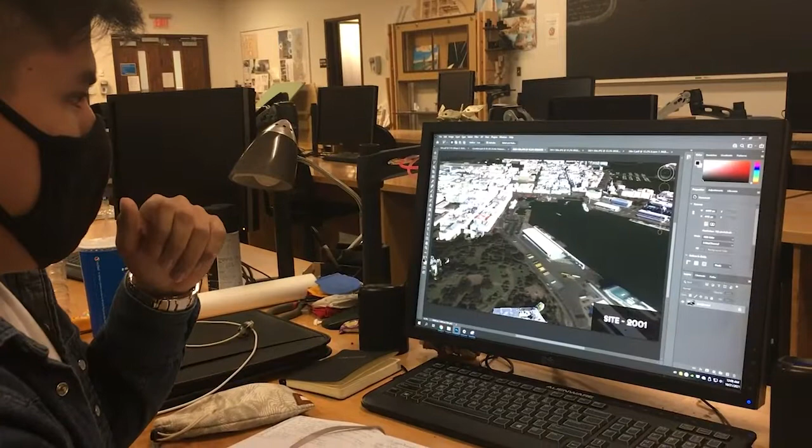This other one I'm still working on, but also emphasizing the green, blue, the life of the site. I had an idea to show what the site looked like from 20 years ago to 10 years ago to now. So this is 2001, this is 2011, and this is 2021. It hasn't really changed that much, but from 2001 to 2021 you can see a little bit of difference.

But this is my other site studies, my site analysis. This one has noise and views, visibility, access points from the site. It also has the circulation, you can kind of see it, it's yellow, and then the bus areas and all the trolleys and whatnot of the area, and you can see boats and all that. But yeah, that's it for now.

As we go on to the next phase, you'll see the progress, and again I'll do a little bit of a documentary of how the project goes along. I took notes, but you have all the stuff I gotta do and what's on my mind, putting it on paper for now, all the research. But yeah, that's it, stay tuned.

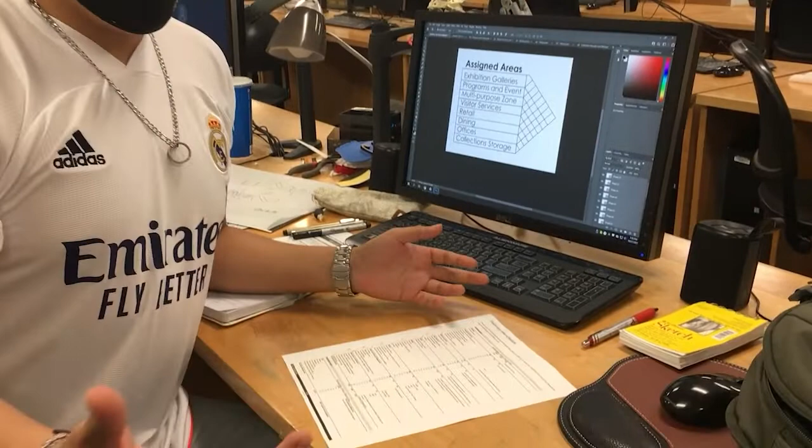I was doing the matrices for the areas. I don't know, I'm kind of overcomplicating it, I guess, because Declan's just doing one for everything. So he's doing all the assigned areas we have and just making that one, while I went into every assigned area. I probably didn't have to do that, but it is what it is.

So you can see all the assigned areas and all the different areas that I have. And this is going to be a legend, so all the colors: mandatory, recommended, neutral, and negative spaces.

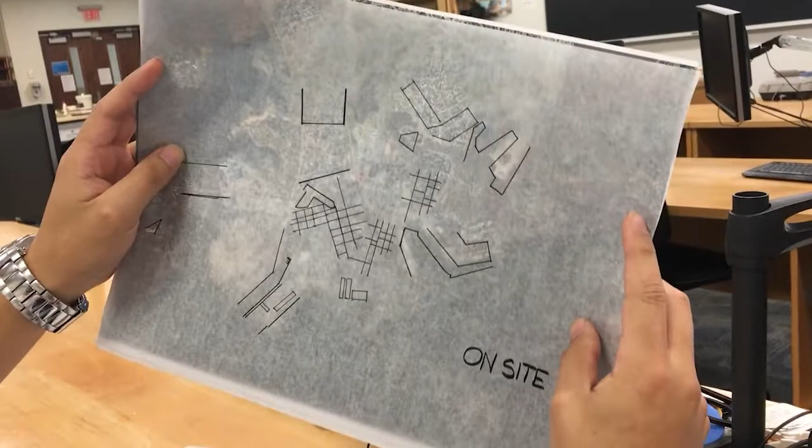And if you want to stroll over here, I did some site analysis, some concept site stuff. I was taking everything on the site, so you can kind of see it here. I think I'll show a better image on the video when I get the chance.

But you can see how I kind of go on with the roads. So this is all kind of roads, building-ish, and this is connecting with waters, connecting points off the site. And that's the micro view.

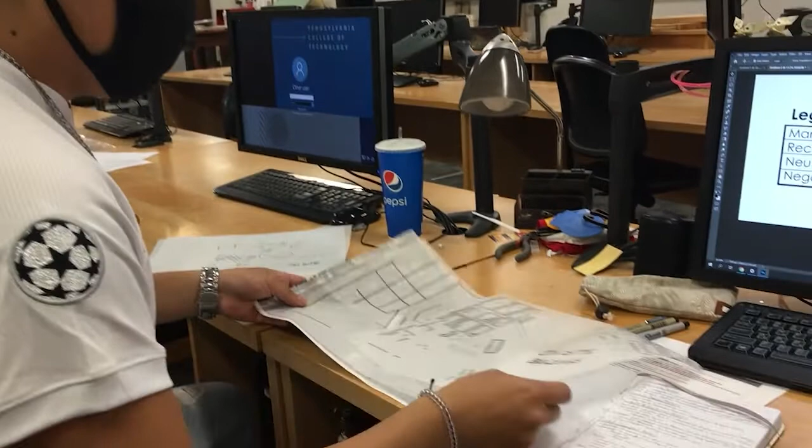And then we've got the macro view, which is off-site, so you can see water areas, but I also connect the three boats together to make a triangle and a little rectangle, and then other points to connect. Same as the other one, I connected these roads, and then these would be buildings on the site. But that's all I got so far.

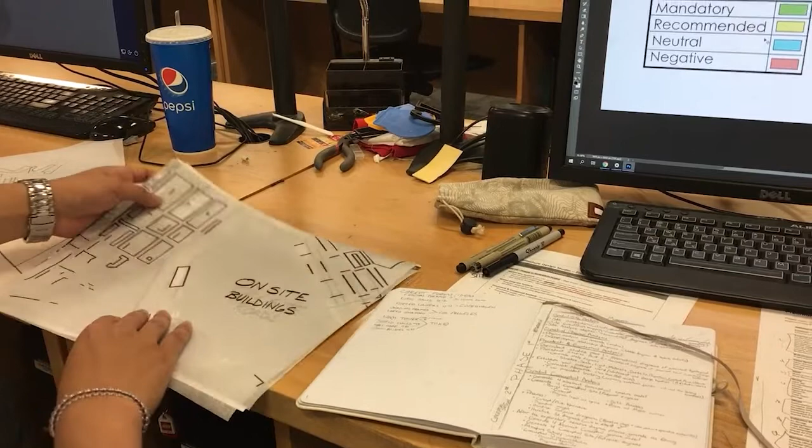It's a continuation. Gotta continue doing this, so I need to outline all the matrices, organize what I believe is mandatory, recommended, neutral, negative, and their assigned places. Then continue with the bubble diagram, the concept narrative, my narrative, and the words I'm going to use. Follow along.

Can you explain? I'm doing some studies of this building, showing the light and shadows. Just doing a bunch of different iterations. On this one I showed scale, so the scale of the building compared to people. This one is just the form. Investigating general study diagrams, this one's on light and shadow, so those are the shadows. I'm not sure what I'll do for the light, maybe I'll just keep it white or something.

It's interesting, I'm starting on mine right now. You can see I've got my images here, for the dining eatery area, facade studies, and interior area, since this is supposed to be a museum - the Hall of Fame of music. So that same building on the outside, different studies of different buildings. I've got a bunch of drawings here, so I need to figure out what I can take from each one to utilize to my extent.

And yeah, that's pretty much it. Just got those out, and then finished the bubble diagram, all of it, all the good stuff. Like four of these in general, just color them in, and then it should be good. Alright, so stay tuned. Alright, peace out.

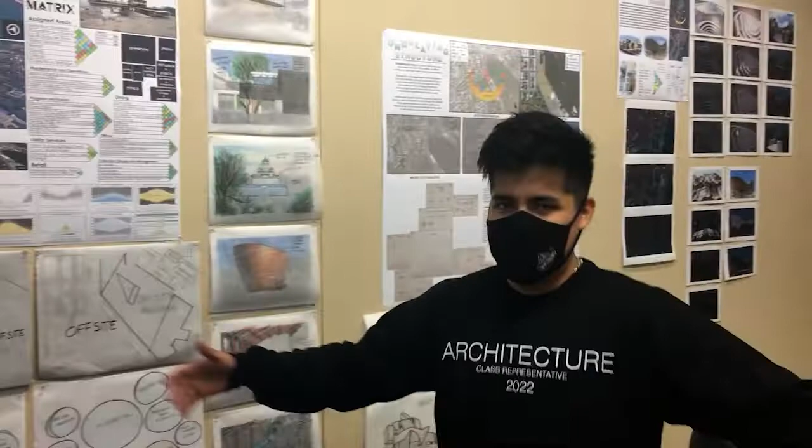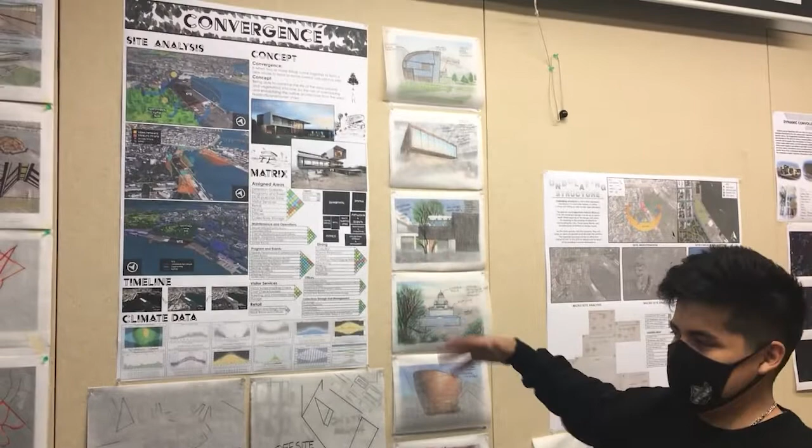Alright, we're back in the jury room. 2017's right there, if you wanted to know. Afterwards, we're back, Alejandro right here, Declan's on the camera, my friend Kavi's over here, never been introduced, over there. Show him real quick. Hey. And we're out here, it's post presentation, so we already presented. Kavi's setting up because his class is about to present.

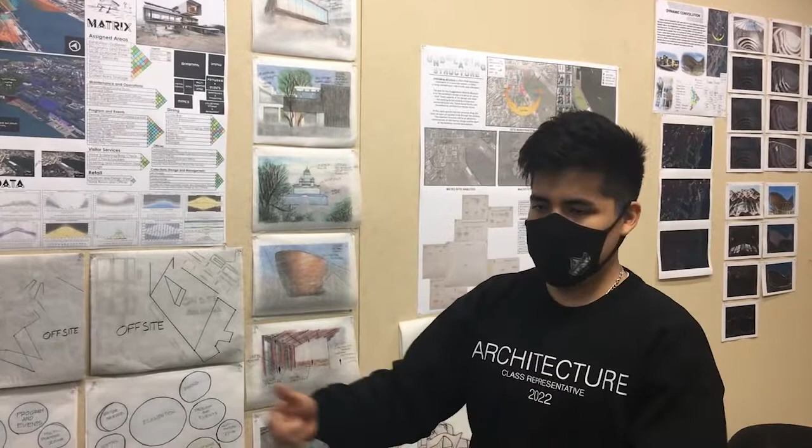My word for the first phase, the research phase, so we had to research the site, research all the different types of architecture and all the different types of styles we wanted to use. My word was convergence, convergence.

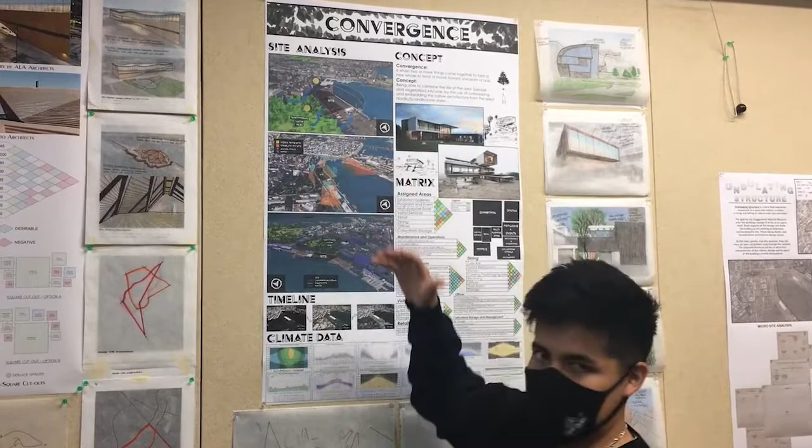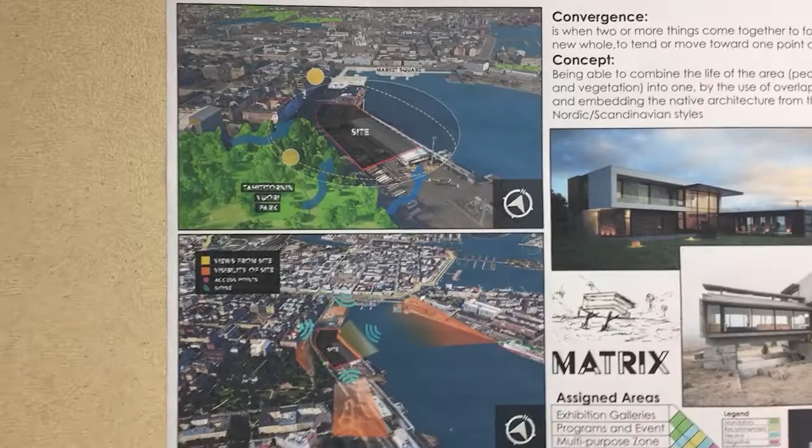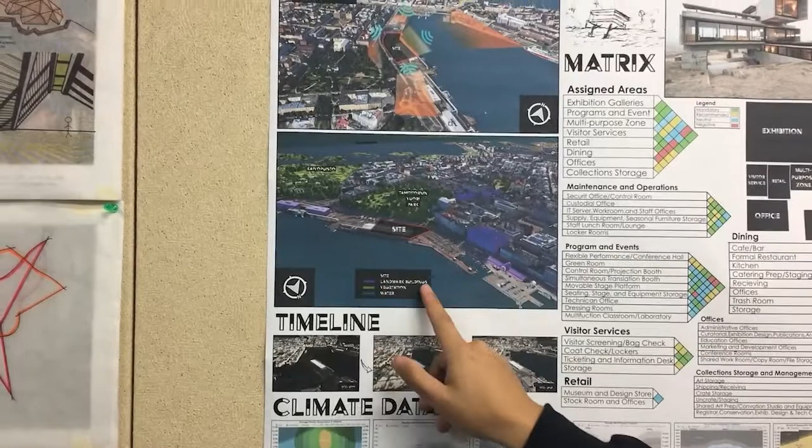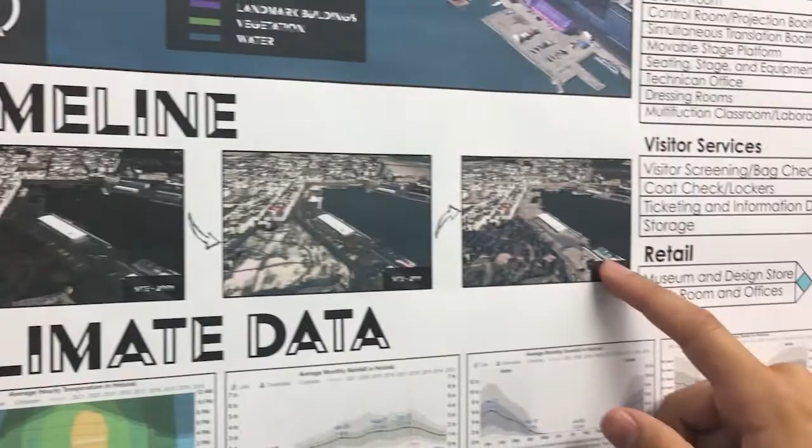Word convergence. For site analysis, I took the information of where the solar orientation is, wind, vegetation, where vegetation is on the site itself, and how it's surrounded by the body of water and how there's market squares there. The other site analysis is the noise, views of the site, views from the site, and then public landmark buildings in purple, and also vegetation and water. I did a little timeline of 2001, 2011, and 2021 - I remember I said 2012 last time, but it's 21. And then all the climate data: rainfall, snowfall, wind speed, climate, temperature, all that.

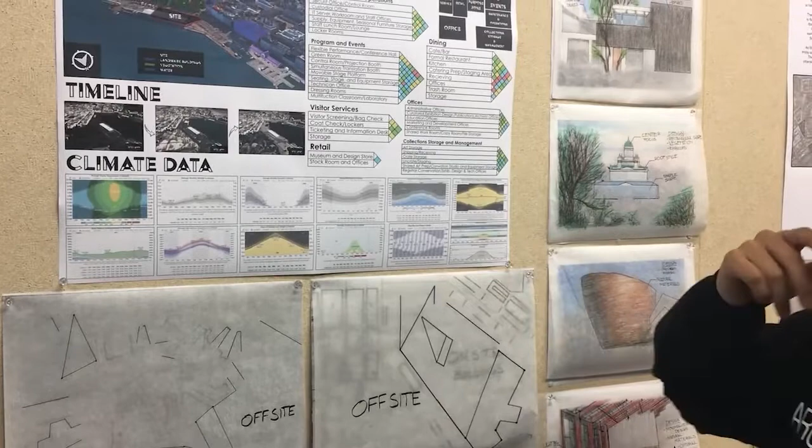It also includes the tourist data, the higher amount of tourists going to the area is in July. Fun fact for Finland.

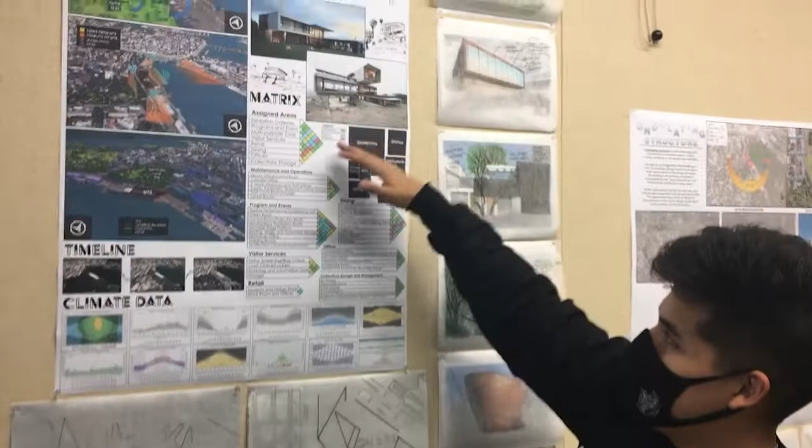And getting to the matrix, it's a single project, we're no longer in groups, sadly. Sadly, Declan, we're no longer in groups, but it is what it is.

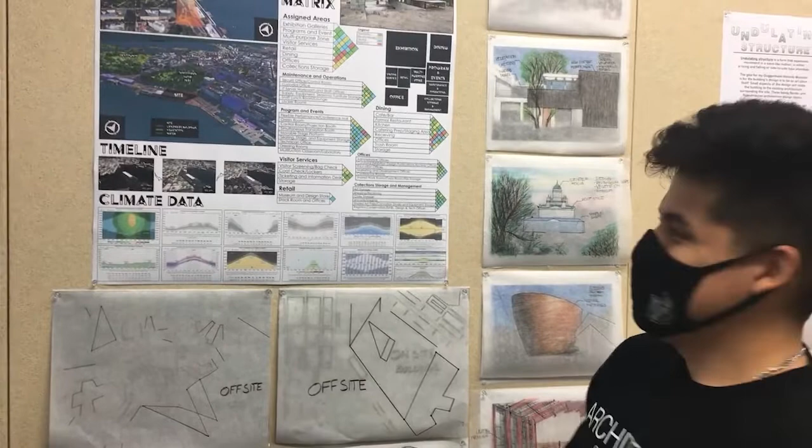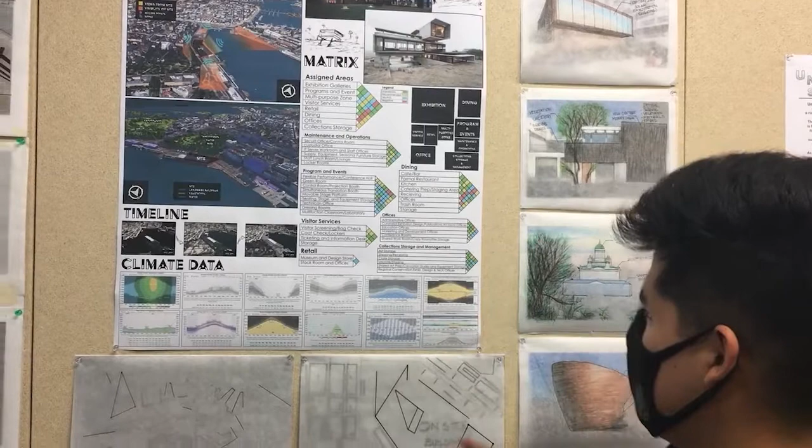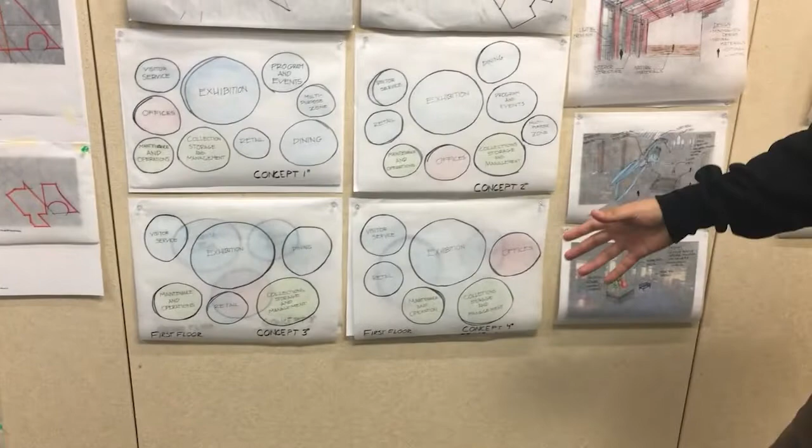Matrix - I took all the areas in groups and made that matrix to see the relationships between each other, then separated them into different little sections. It was a little bit too excessive, no one else really did that, but it helped me come up with a cutout diagram, which I photoshopped to look a little better, and then bubble diagrams of ideas for the possible floor plan. Still really just concept, not really focused on that much - more focused on the research.

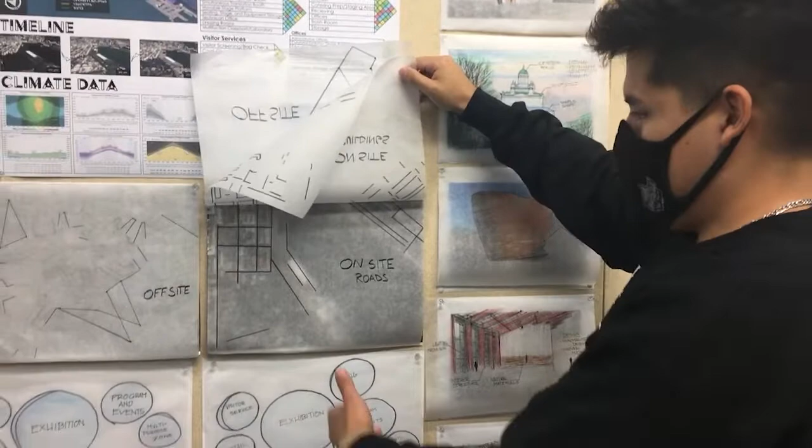So for the micro macro drawings, from the micro it's just the site itself, and then I got the roads on the site, which gave me an idea of more of a square cutout, rectangular. That's where I got the building's rectangular shape and more fine line finished. Same with the macro version of the site.

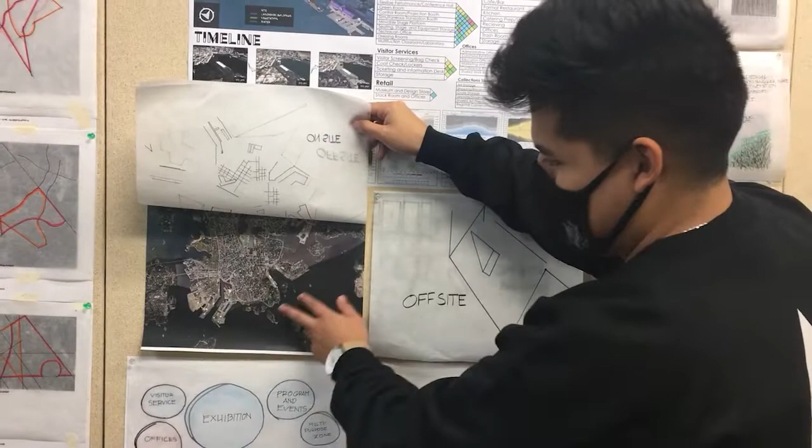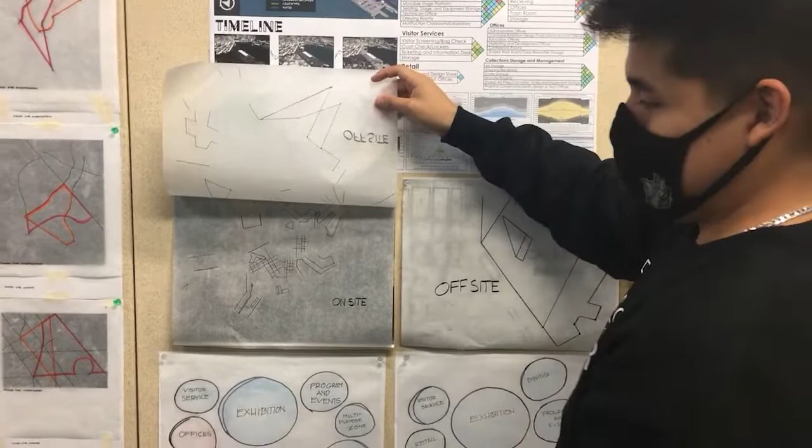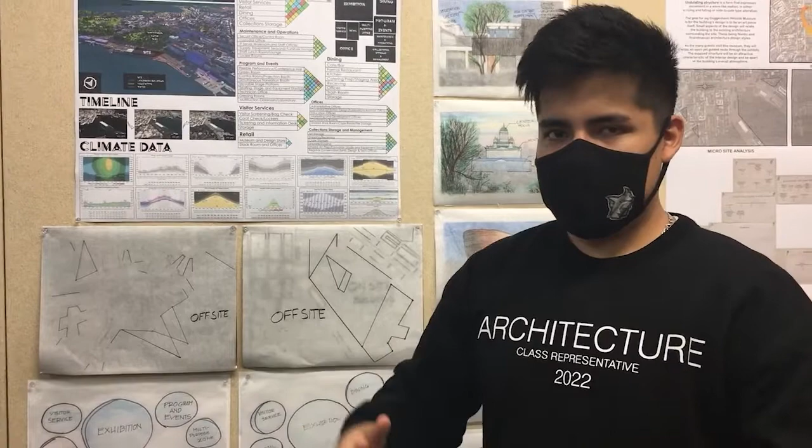So it's in Helsinki, Finland. It's going to be a Guggenheim museum. Using my word convergence, convergence means the bringing together of multiple different things or several things meeting at one certain point, or them forming one whole new thing. So that's what convergence means.

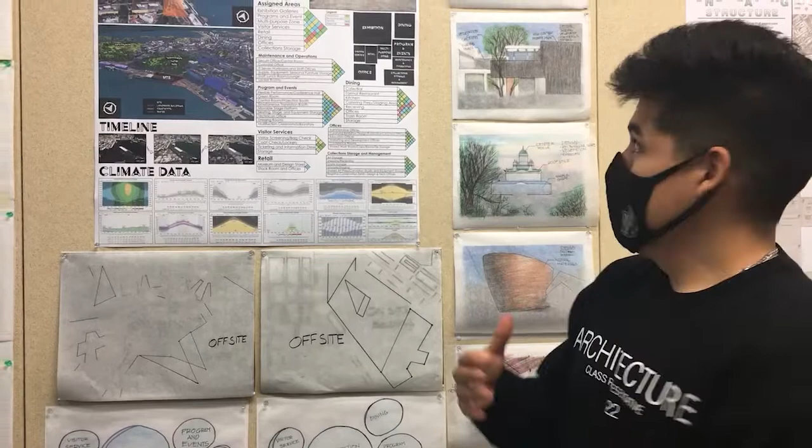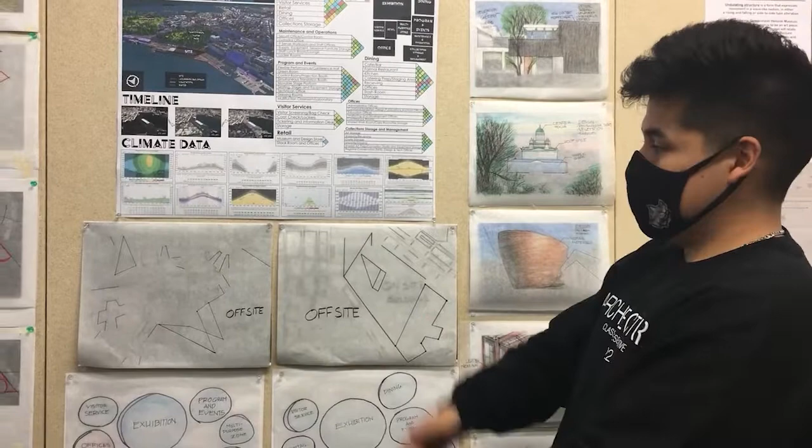My concept overall is to bring the vegetation and the public together, along with the artwork that we're going to show in the museum, totally combining that, having them set at a centralized point, being the museum. Moving to the precedent images and research that I did, I took several buildings from the area, from a chapel, a studio, to a music hall.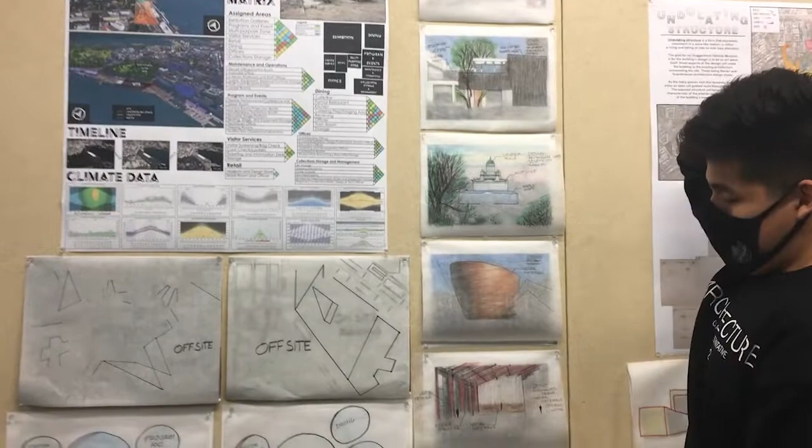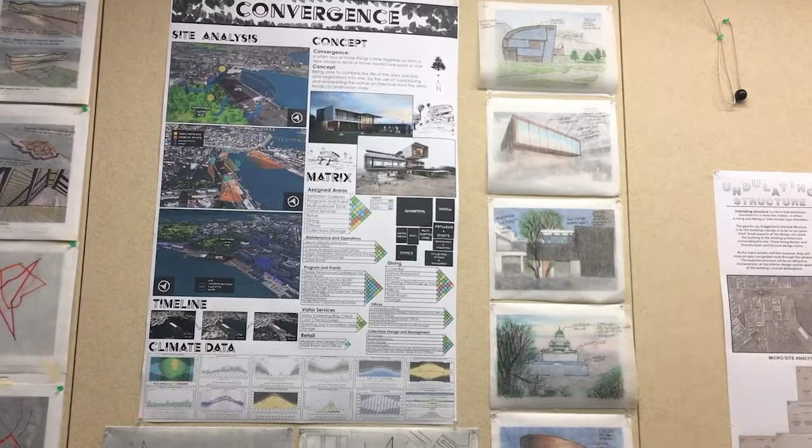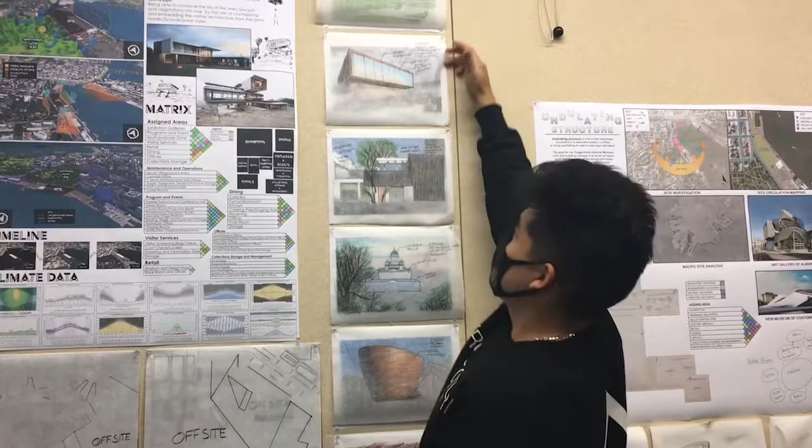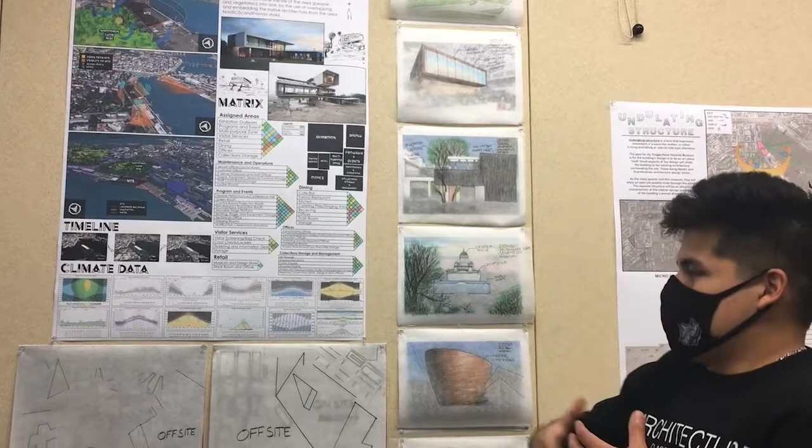The first one I got extended facades for shading, and organic colors and color variety, so playing around with the colors. Summarized, that would be simple modern minimalistic form, adding vegetation to the site. This one is more solar, because the windows have more focus on orientation, optimizing the solar gains, where you can get it and where you don't need it.

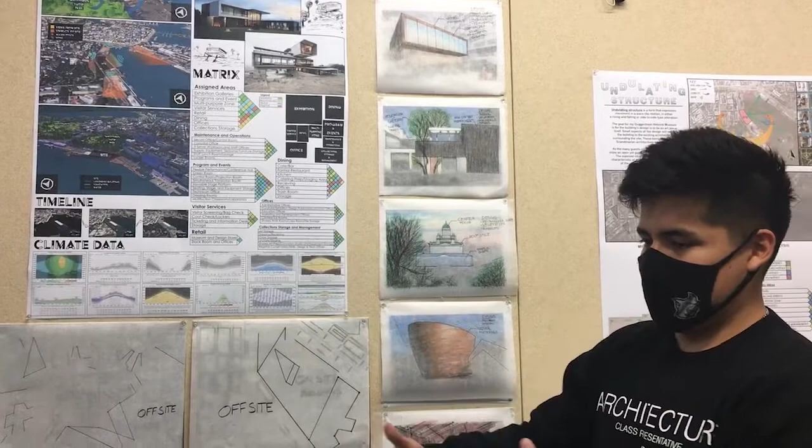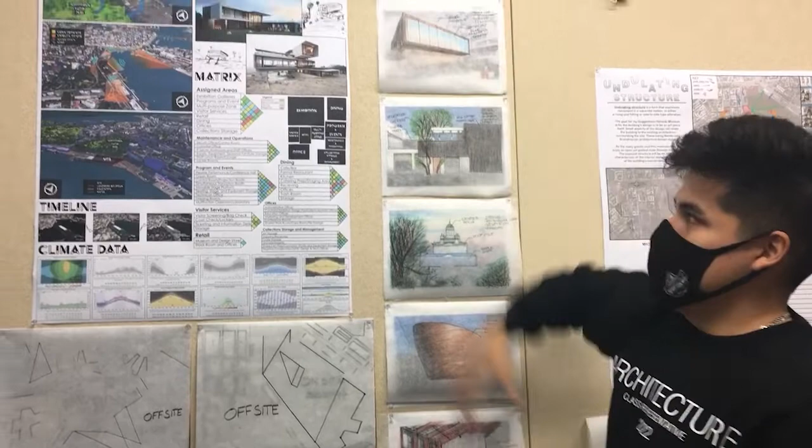The possible ideas, having it for the future from the possible building. Natural materials is something I want to highly enforce in what I'm going to do. This one also being passive design, minimalistic again. Another word I wanted to tie into convergence is overlapping design, which you can see here, this is overlapping each other.

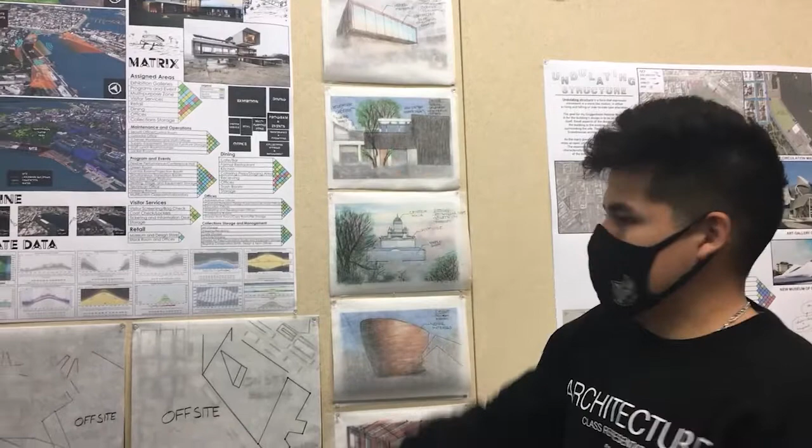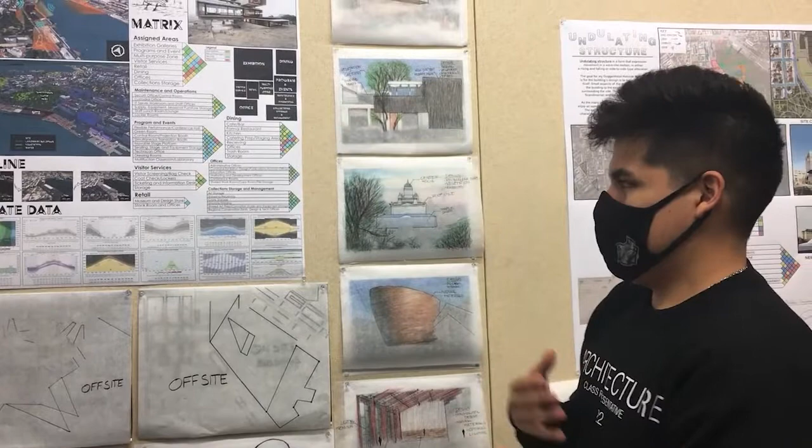The next one is the studio I was talking about, and the shading. I want to really enforce shading, so it's a type of shading feature that would be a good implement against the sun. Then a high contrast of color to make it more focused, and obviously vegetation again.

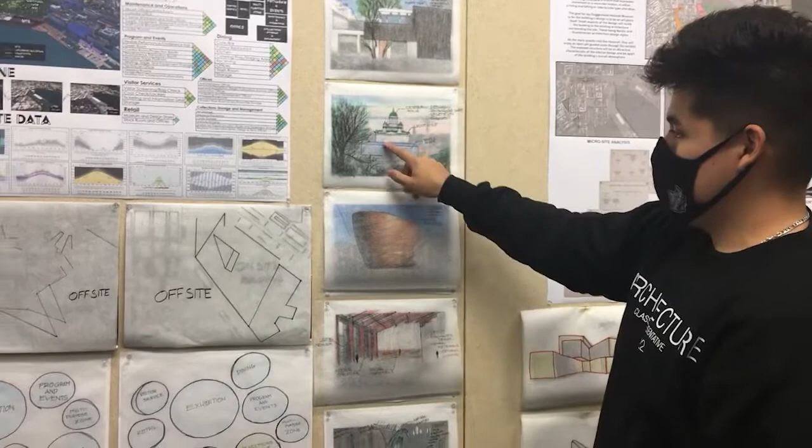So materials, vegetation, and a new word I wanted to involve is embed. In embedded design, which you can kind of see happening here, it kind of nicks in, like it gets inside of it. You can see it more here, how this is just inserted inside. That's what it means, embedded design.

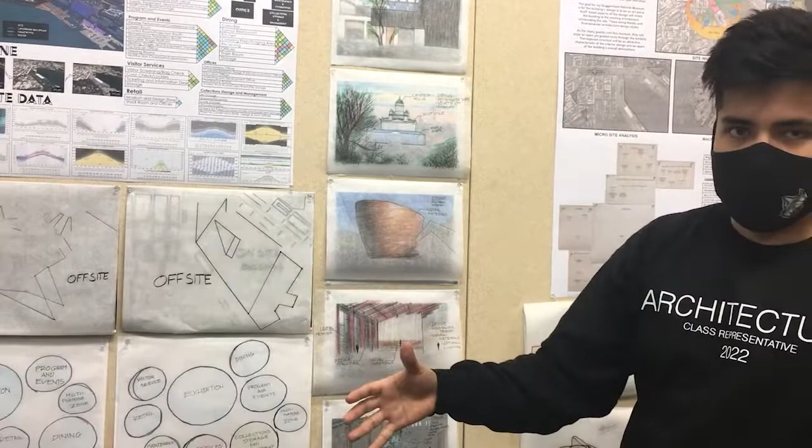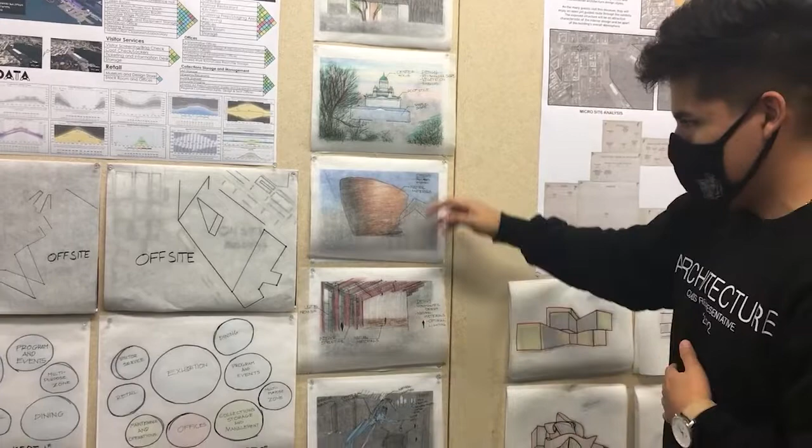This one also is taking the idea of a center focus, so maybe I'll have a center focus of the building, a simple shape, and rooftops, getting different roof styles. Running through the last one really quick - modern, natural color, like a natural material being wood. This one shows the structure on the inside and lighting from the windows inside.

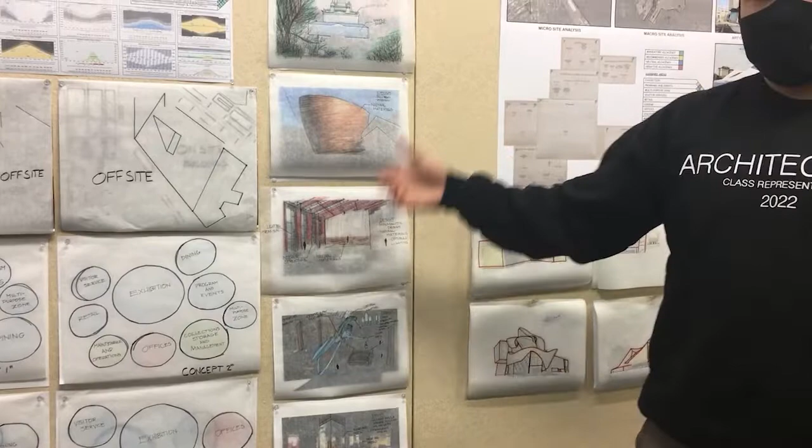Also having natural materials on the inside, being minimalistic design, but also really aesthetic to be in the atmosphere of it. This one has a central focus of the artwork, making it an active design, having people walk around it. Then having the structure really emphasized and involved.

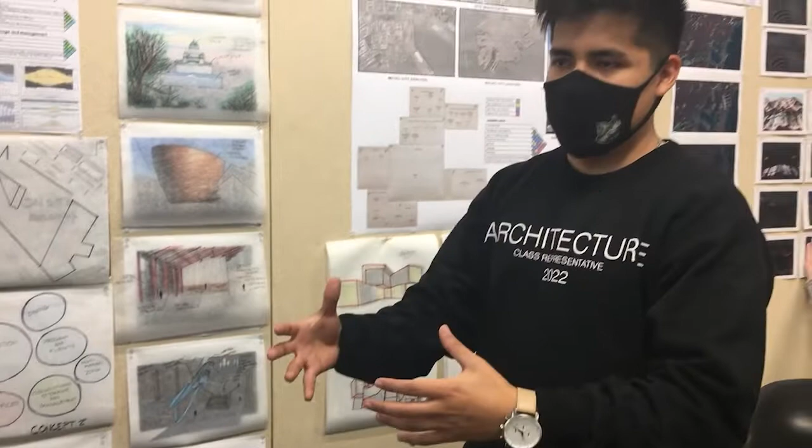This one has another centerpiece, and then a seating area, more than just one bench, emphasizing that. Different areas for different art pieces, but overall focusing on the art, more on the interior than anything. So these two buildings I want to emphasize in the design would be this one.

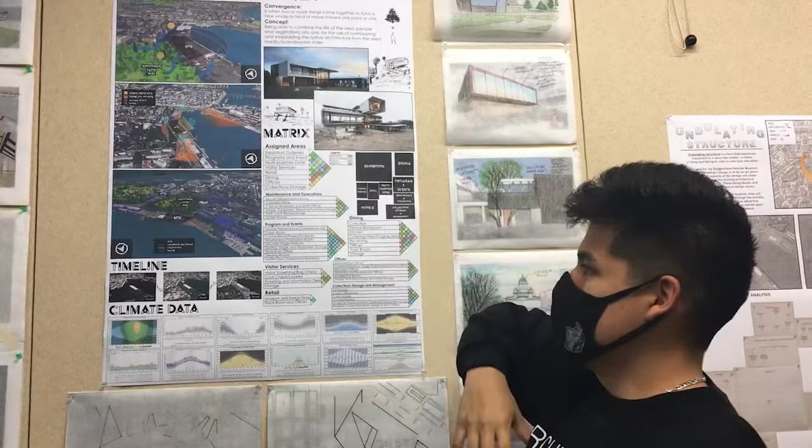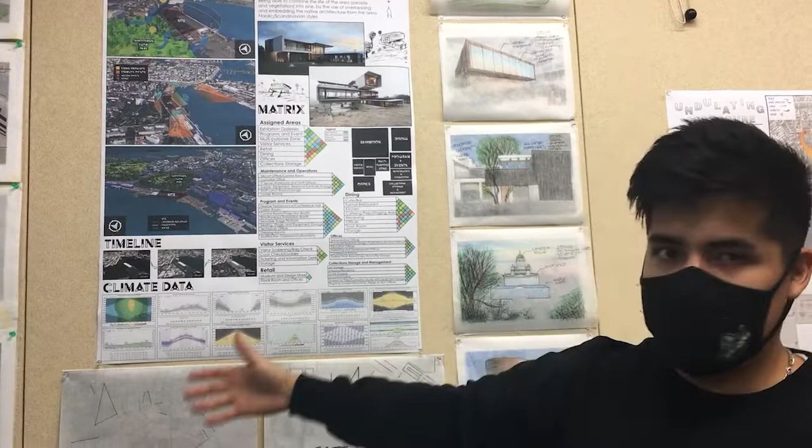This would be overlapping and also embedding, and the minimalistic features of the building being the wood design, and obviously the open glazing and everything's open in that. And this one would be like embedding, obviously same convergence, meeting at one point, but also I wanted to highly focus on the minimalistic features and the natural materials. And yeah, that's it.

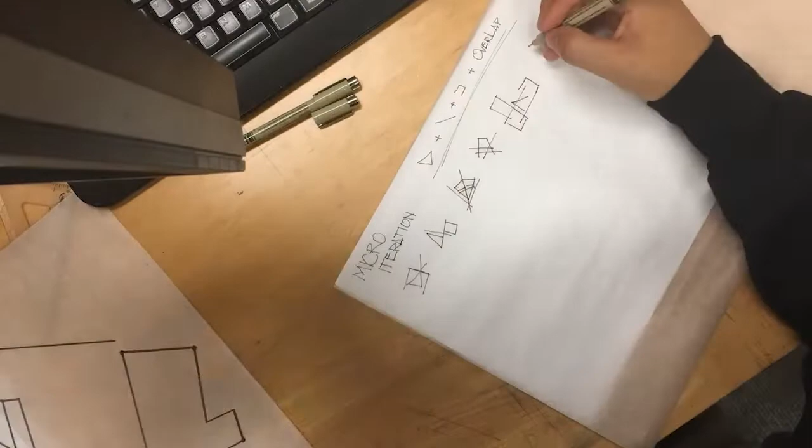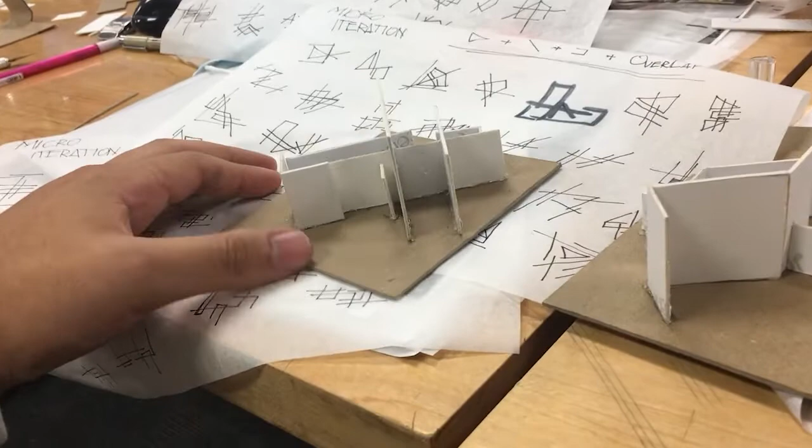In 2017 right now, I just finished all my models. I want to show you guys. So we got the two models down. Took me a little bit to create these, but I'm taking them from the micro iterations and macro iterations I made from the site, so you can kind of see how this one fits in this one right here. It's missing a few elements, like a triangle, but it's a different iteration in the concept. And this one, I believe, is this one over here, this one over here. It's a different form, taking some away, acting like it's a different feature. Let's just continue going at it, and I'll put pictures when I'm done with each one. Keep you updated.

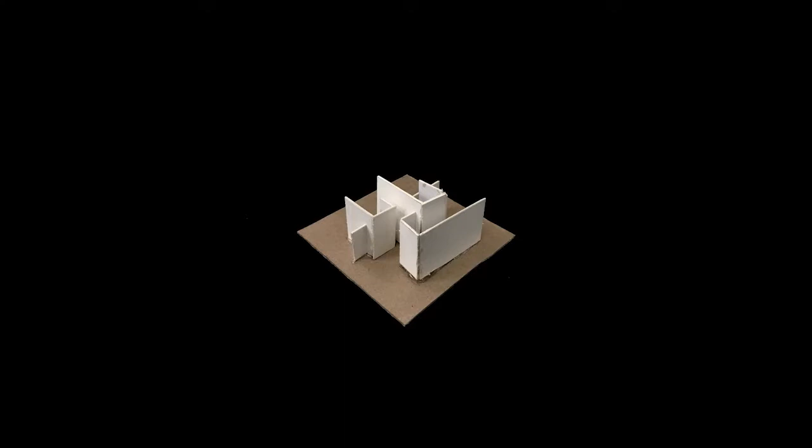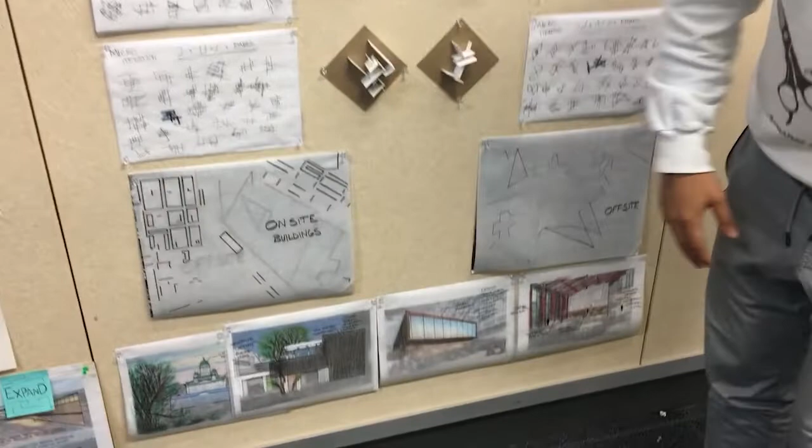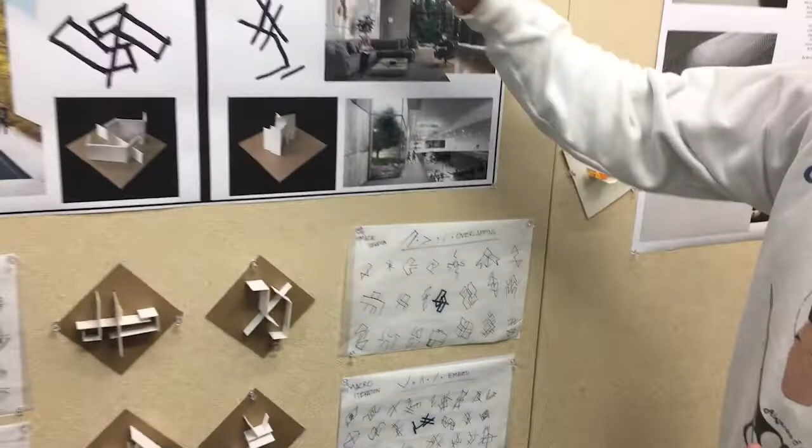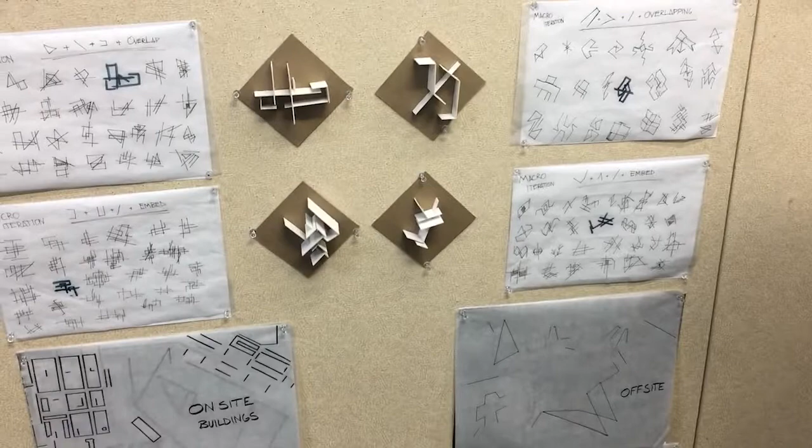So we're here in a jury room, post-presentation, concept design, concept phase. It went pretty good. The word is still convergence. I added two other words, overlap and embed, and taking my iterations from the macro site plan and the micro site plan, I came up with these different collages of shapes and lines, using the words overlapping and embedding along with convergence in mind. I came up with these four models, and during the presentation I said the strongest ones I thought personally were this model and this model, and you can see they're outlined, this one here, that one there.

Building wise, what I wanted to achieve was having the building connect, as convergence is connecting several things and having it intersect in one point. It would be having life, like vegetation, the public, and the buildings and the area of the site, as it be like the vegetation, the park and near area, or the body of water, and the views especially, all intersected at one point, which would be the Guggenheim Museum that we're designing.

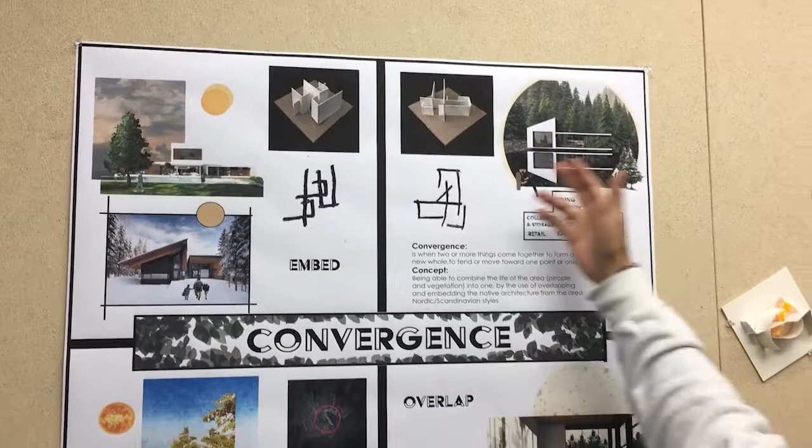And you can kind of see in the collage of images I have that I was exploring the different facades, different roofs, different materials. Obviously they're all natural materials, but different colors and different variety of possible materials, whether it be in winter and summer or fall.

In this area, I was kind of determining where the spaces would be. Dining room probably in the top floors to give the most views, or this could still be mixed up. It's still the concept phase, so we still have to play with it a little bit. Then these interior spaces would be more of what I wanted to achieve on the inside, as it be the exposed structure on the glazing, and then having the walls on the interior plain and a little bit more minimal and simple, so the emphasis is a lot more on the artwork rather than the building itself on the interior. And adding maybe a little bit of color in there with the vegetation.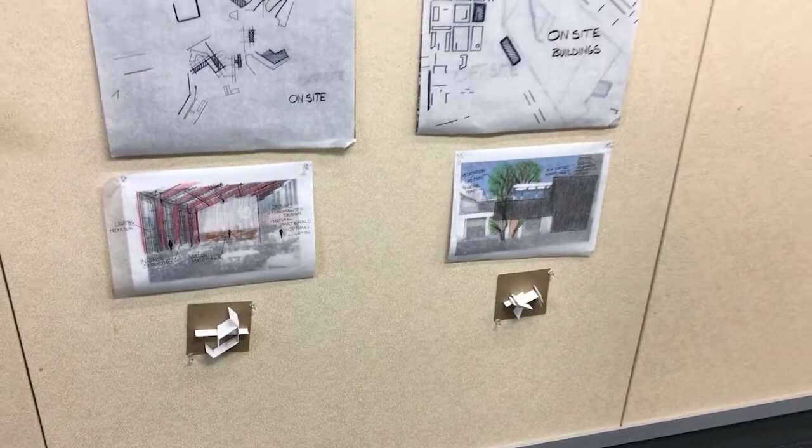From the beginning phases, these two precedent images I thought were a really strong concept to continue on in my project, showing the structure and also the natural materials that they had, and also the design features of the shading, vegetation, the minimalistic design, and the embedding that it had in it.

And then I took these models from the last phase, the concept phase first part, and then did more iterations off of it. So you can see those models.

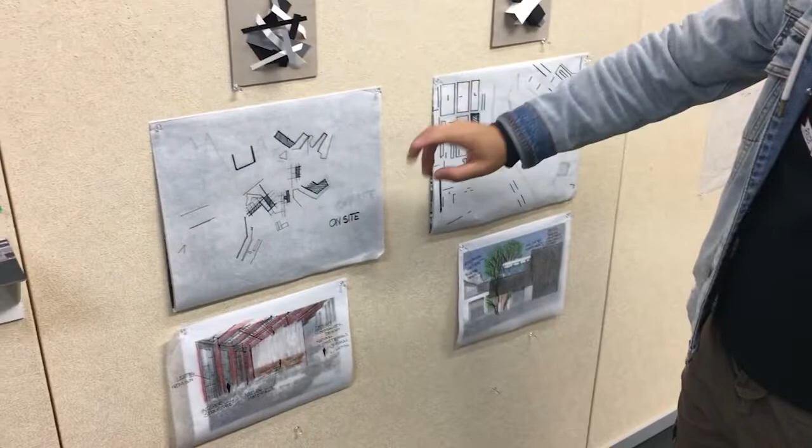Did more iterations off of it, and then having the word embed, the meaning of it would be to fully lock in into another shape, or just sit in there, and overlap, meaning obviously to intersect or to go on top of one another. I just wanted to show where I got the original shapes from the first concept models, so they were from the site precedent, the precedent site research.

So just drawing from the site, from the macro, micro. And then going to the next phase of going into more depth of the concept. And then you can see these models.

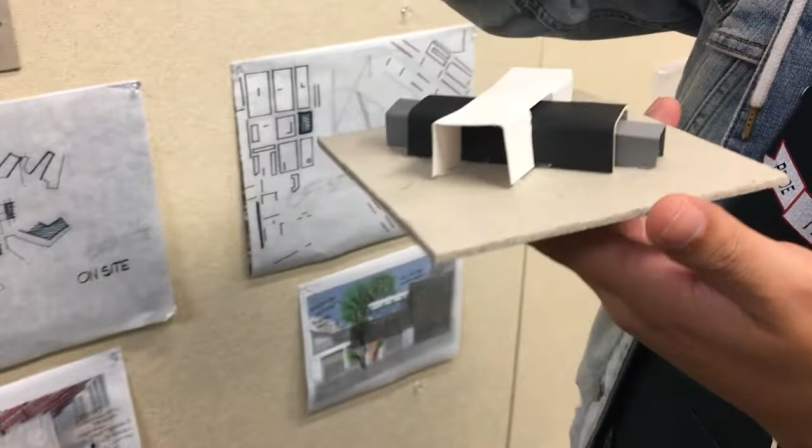This one would be a perfect example of embedding, this is literally just sitting inside of it. It's embedded into the black material that I used, and then this one's just inside of it.

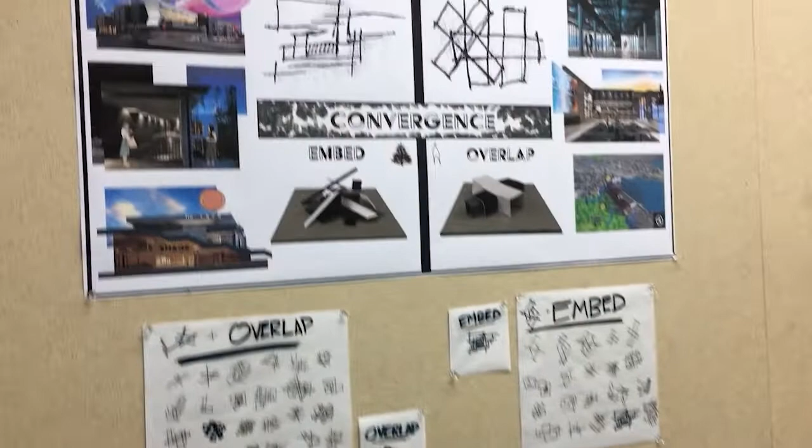I thought the embedding was a strong feature because embedding and overlapping does go with convergence. It does tie in really well with the word convergence because they mean similar things, or almost the exact same thing.

And overlapping, you can see the model here, the one I chose, the strong image. I thought was really attractive and adequate, or aesthetically pleasing to look at.

So I tried to recreate it with the materials I found in the lab, and this is what I got. It could be some form like this, some chaotic form, or it could be more orderly, which has more straight cuts, overlapping to embedding, fully combining.

This is just a full example of overlapping. That's what I wanted to achieve.

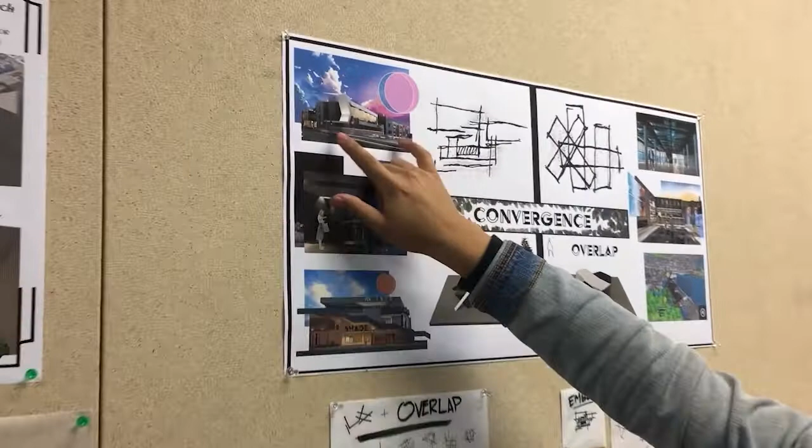And going my atmosphere, showing the sun. Showing first, I wanted to show the site exterior, like the exterior of the building, whether it be concrete, steel, wood, accents of wood or glass.

This would be the full experience, how you're gonna experience it. So I was just testing things out, and then this is a feeling of inside and outside, of how different it would feel from inside and outside.

Which I was thinking on inside the structure, where there's parts that just a long hallway going to another exhibit of an art piece. It could be some decorative things happening with the lighting, or decorative things happening with the walls and the concrete.

And using the next atmosphere drawing would be like the facade, more of a facade study, which would be extending something out to add more shade to the area. So something similar to this, it would be like a shaded area inside there or inside here.

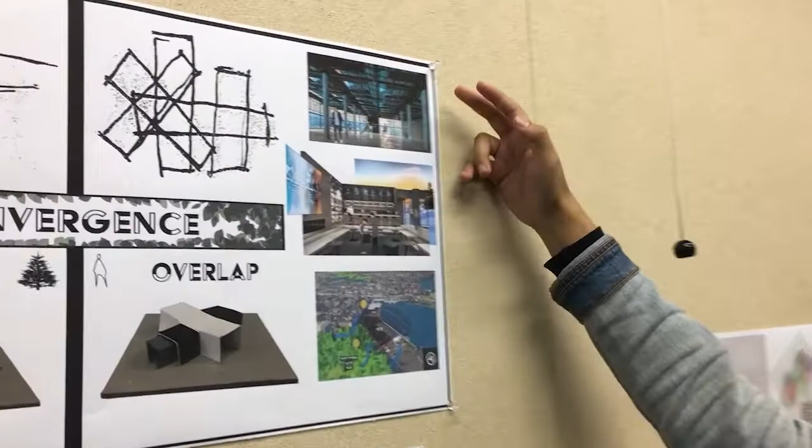And the next one is emphasizing the structure in itself. So everything in blue would be the structure and how open it could be, possibly how open it could be.

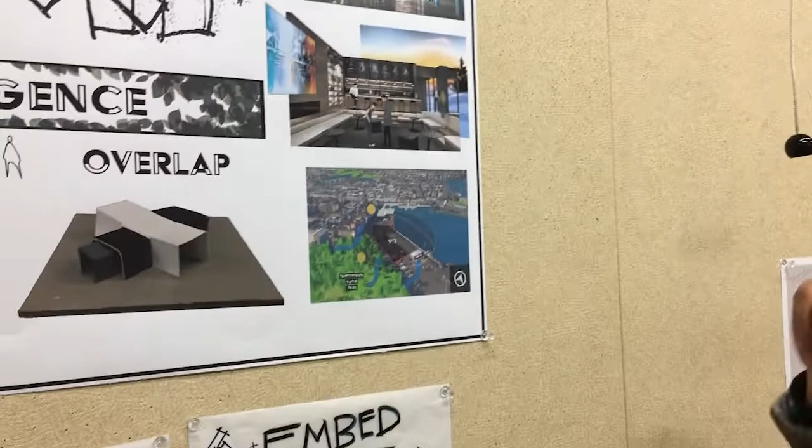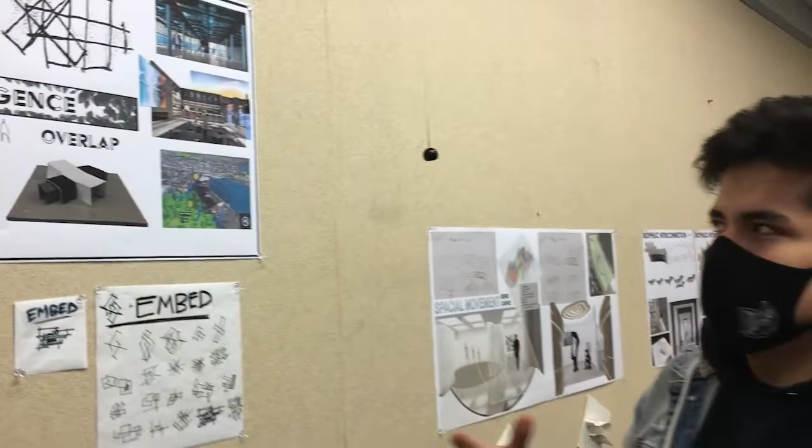And the next one after that could be like some dinner or bar area, or pub or some lounge area, but also having that exhibit, even though it's more of an area of discussion, that still strongly emphasizes the artwork. And then the overall site plan, where the site lies, and the vegetation on the site, where the parks are, the sun paths, and the wind.

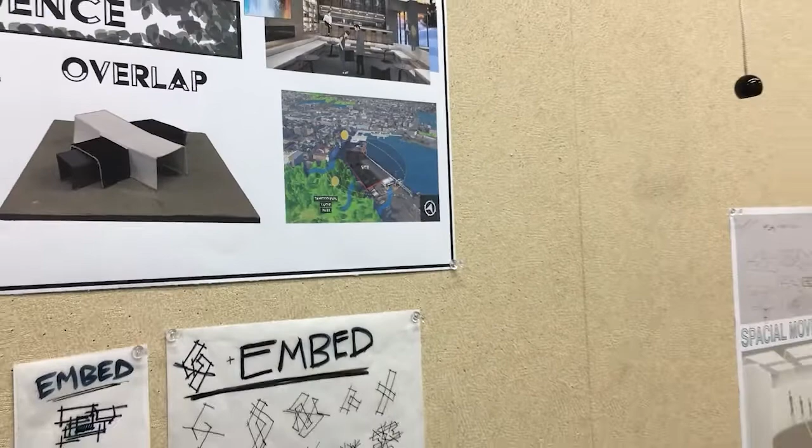And yeah, that was pretty much it for this checkpoint. I think I'll cut it here, and then the next phase is the schematic phase. So this phase was the research phase and the concept phase, so you'll see where it goes on from here. Like my professor was saying, to combine these together, but more focus on embedding. So that's what I'm going to try to do in the further process. And alright.